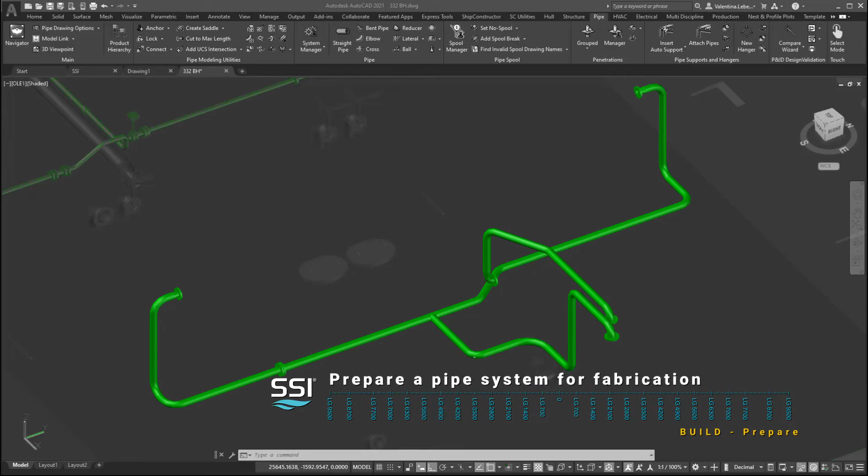In this demonstration, we will prepare a piping system for construction, then review and plan the shipwork breakdown structure based on the information contained in the product model. We will consider the production requirements and constraints of the shipyard and create spools as needed for pre-assembly and treatment in the workshop. We will perform a quick review of the dry goods conveying system in 3D.

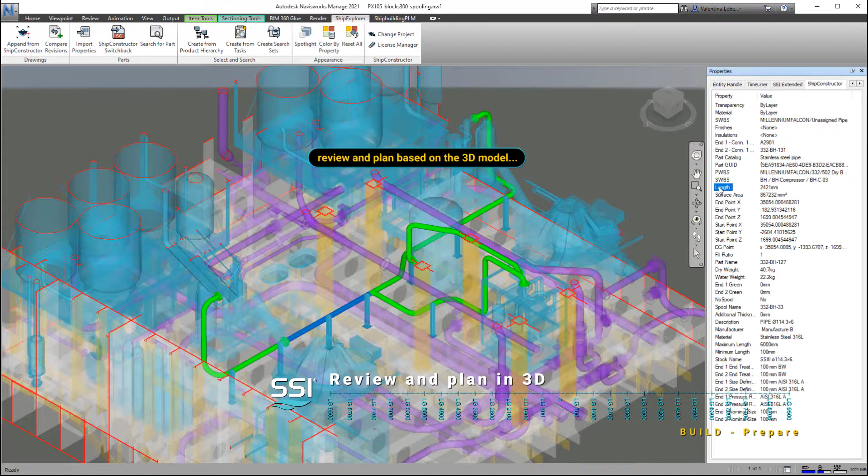We set up and visualize the model to identify where to break the system into spools. This often depends on the nearby structural and outfitting items. Checking the length and weight of individual pipes allows us to identify any production or handling issues and plan the placement of spool breaks accordingly.

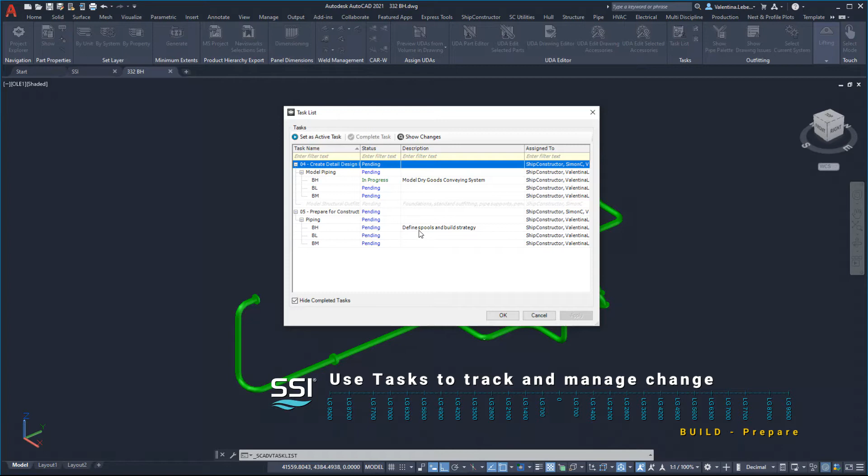Before we start preparing the piping system for construction, we will activate a task to manage and track changes. We will use certain criteria to prepare the system for fabrication. Each spool shall have a maximum of 2 bends. The length of a pipe should not exceed the maximum length of available pipe stock, and the weight and overall dimensions of a spool shall be manageable in the available space.

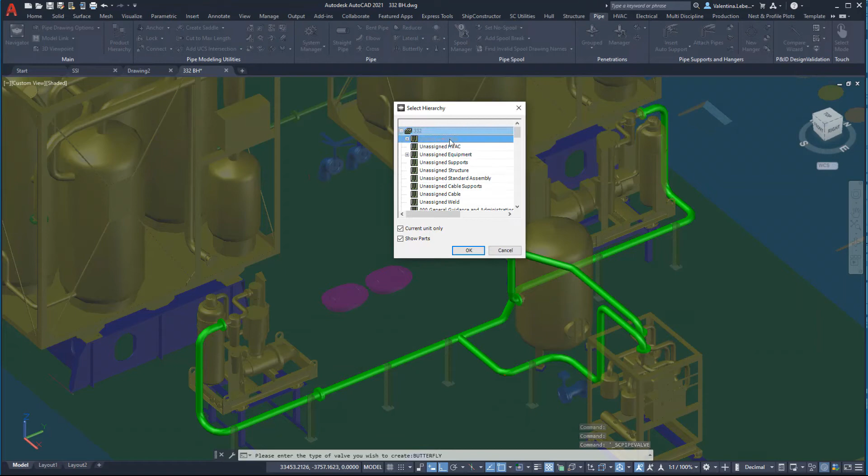In cases where we need to insert valves that are not typically spooled or add flanges for manufacturing and assembly, a spool break is added automatically. In this case, we have inserted a butterfly valve for maintenance reasons. When all spool breaks are defined, it's time to group the parts into spools and find their logical place in the build sequence.

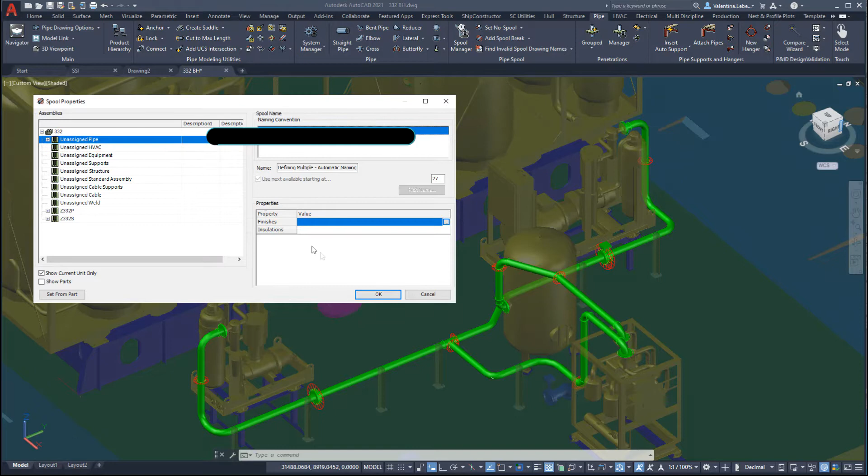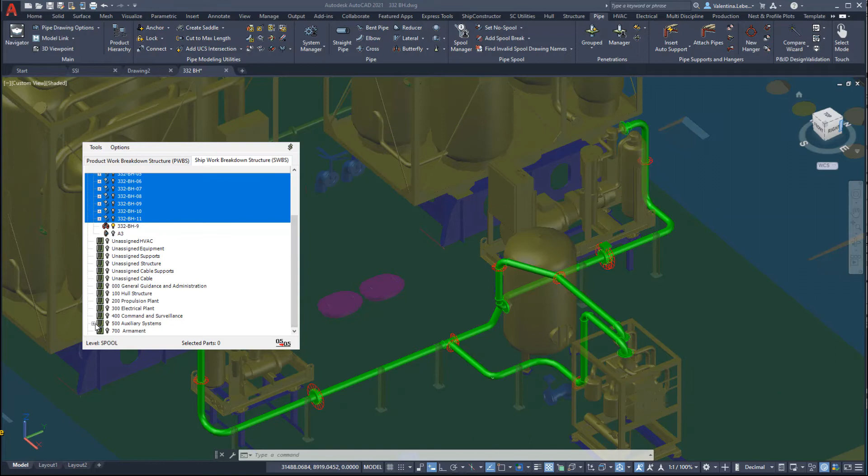After defining and approving the spools, we lock them to prevent any changes and indicate readiness for fabrication. Where necessary, spools are assigned to an appropriate location in other project breakdowns, like the shipwork breakdown structure. We will also assign to the assembly any accessories required for assembling the spools into a system, such as fasteners and gaskets.

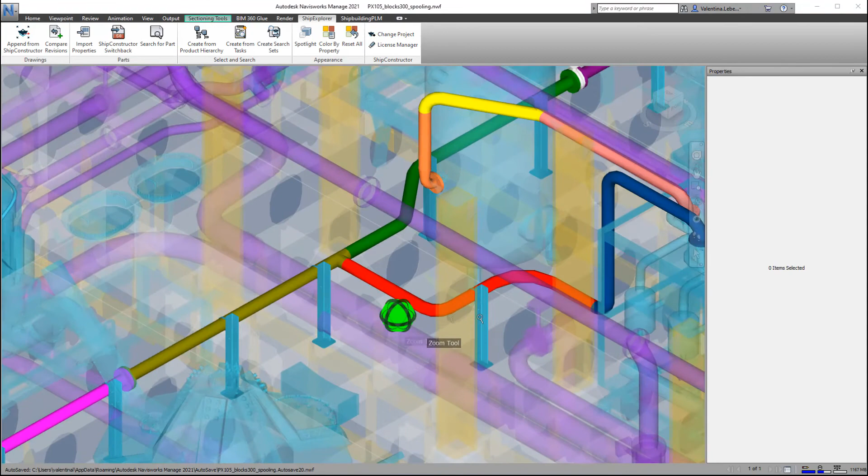As a final check, we will review the defined spools and surrounding areas of the vessel in 3D. By easily identifying each spool and the unspooled valves, we ensure that there will be no issues during fabrication or installation. Now that we have defined our production requirements and prepared the dry goods conveying system for construction, we are ready to move on to the fabrication phase.